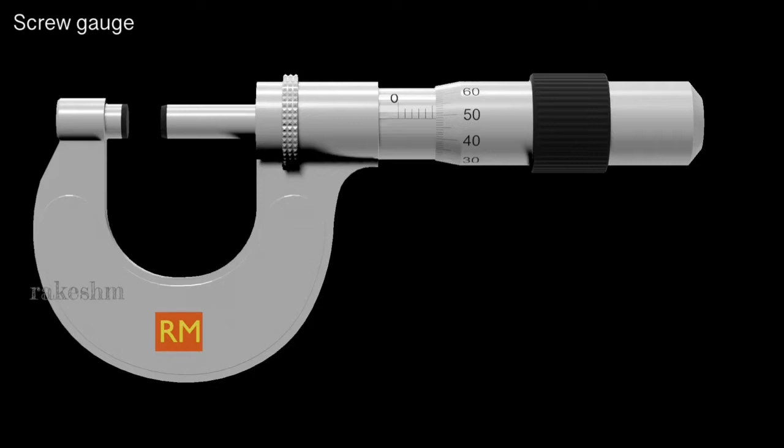Today, let us study about screw gauge. It is an instrument used to measure lengths up to an accuracy of 0.01 millimeter. If you recall, we had discussed the least count of a meter scale was 1 millimeter, or it could measure accurately up to 1 millimeter. The least count of vernier calipers was 0.1 millimeter, and now we are going to study screw gauge, and its least count is 0.01 millimeter.

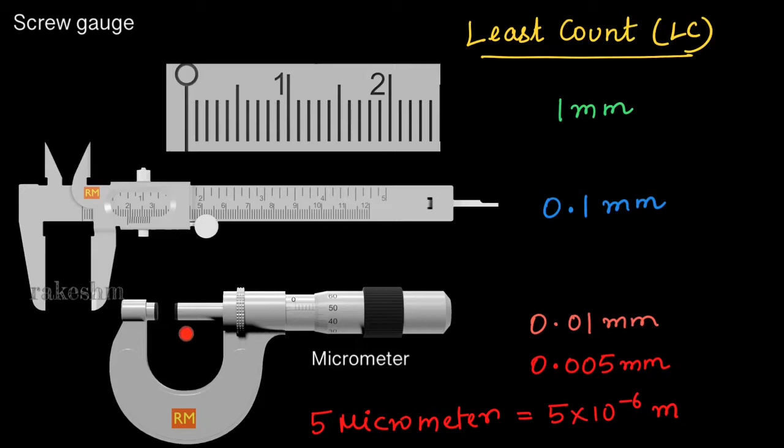There are screw gauges which can measure lengths up to 0.005 millimeter also. This 0.005 millimeter is nothing but 5 into 10 power minus 6 meter, which is also 5 micrometer. Now, as the screw gauge can measure lengths up to the order of micrometers, it is also called as micrometer screw gauge or micrometer also.

One more important point to remember is that the least count of an instrument is also the maximum possible error. So if this vernier caliper can measure lengths accurately up to 0.1 millimeter, below this length it cannot measure accurately. So we say the maximum possible error of this vernier caliper is 0.1 millimeter. The maximum possible error this meter scale can have is 1 millimeter. The maximum possible error of a micrometer screw gauge is 0.01 millimeter.

So if you are getting the reading of this vernier caliper as 2.3 millimeter, then the error in the reading will be 0.1 millimeter. So just remember this, this will be important while solving questions.

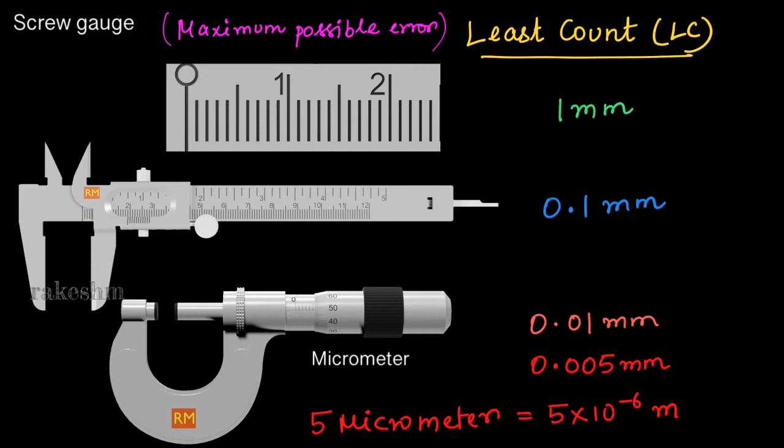Now let us understand the different parts of a screw gauge. The part that you see here is called the linear scale. This scale is fixed. This part that you see here is called the circular scale. This circular scale can be rotated about the linear scale. The part here is called the screw, and it can move forward or backward based on the rotation of this circular scale. I will discuss with you how this screw moves forward and backward when the circular scale is rotated. The part that you see here is called the stud.

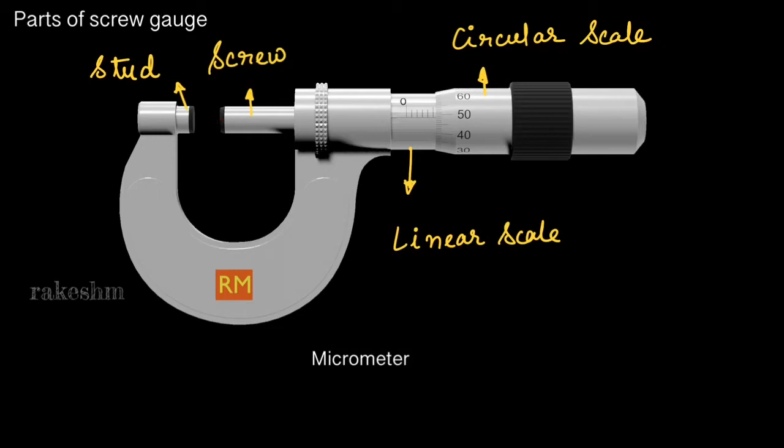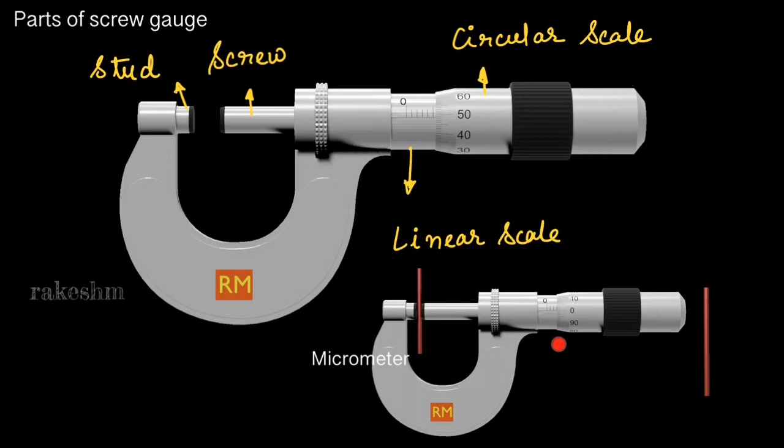When the end of the screw touches the stud, we say that the reading of the screw gauge is 0. The screw gauge is used to measure the diameter of wires. It is also used to measure the thickness of metal sheets. For example, we have a copper wire here, and we want to measure the diameter of this copper wire. So what we do is we place the copper wire like this in between the stud and the screw and take the measurement of the diameter of the copper wire from here.

Now, let us discuss the principle of working of a screw gauge. We have a screw here, and these you see are the threads of the screw. The separation between any two threads is called pitch. Remember this term. When the screw makes one rotation, it moves forward or backward by a distance of one pitch, which is the separation between these threads.

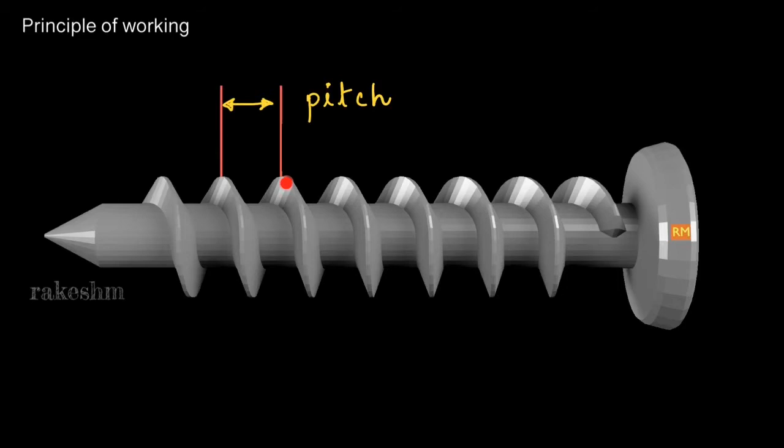So the direction in which the screw moves can be determined by the right hand screw rule. If you curl your fingers in the direction of rotation of the screw, then the thumb will point in the direction of motion of the screw. Let me play the schematic now, and one more thing I want you all to notice is, when this screw makes one complete rotation, it moves forward or backward by the distance equal to the length of this pitch.

So you can see here the fingers are curling in the direction of rotation of the screw, and the screw is moving forward. In one rotation it has moved by one pitch length.

In this case, we will rotate the screw clockwise and let us see in which direction the screw moves. You can also use your right hand and curl your fingers in the direction of rotation of the screw, and the thumb will point in the direction of motion of the screw. Let us have a look at this.

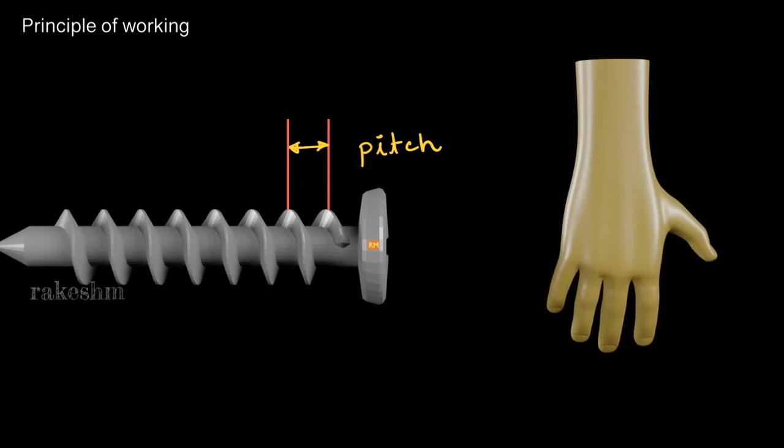So you can see here the fingers are curling in the direction of rotation of the screw, and the thumb points in the direction of motion of the screw. Meanwhile, during one rotation, the screw has moved by a distance which is equal to the pitch length of the screw.

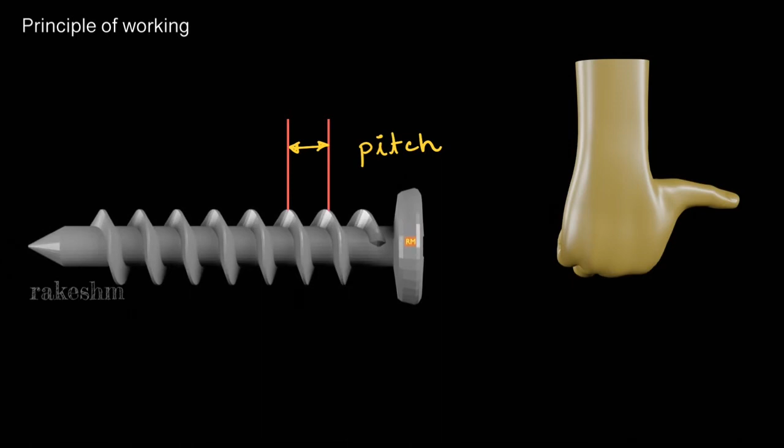So here you can see how the screw gauge works. As I showed you in the screw, when this circular scale is rotated clockwise or anti-clockwise, depending on the sense of rotation, the screw here moves forward or backward. Let us have a look at the schematic.

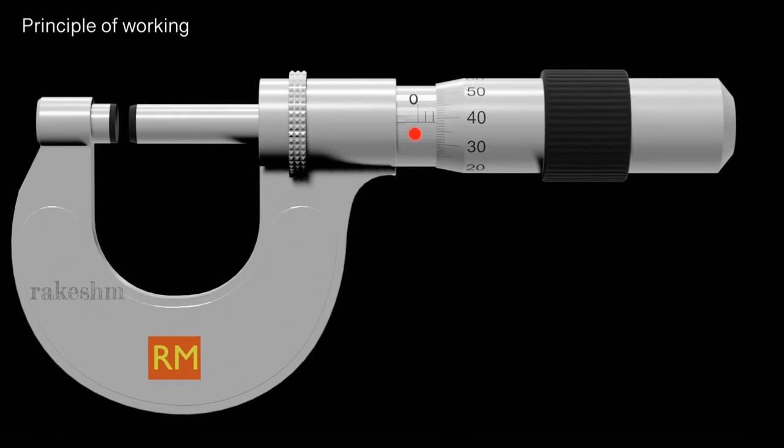Observe here, when this circular scale is rotating in this direction, the screw here is moving forward. And if you want to measure the dimension of any object, you place the object here and take the reading from here.

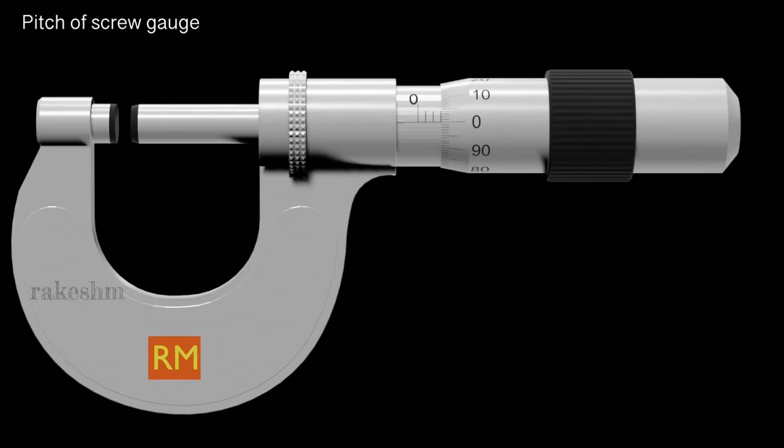Next, let us learn about the pitch of screw gauge. I will just magnify this part and show you and help you understand what is pitch. Pitch is the length moved by the circular scale when it completes one full rotation.

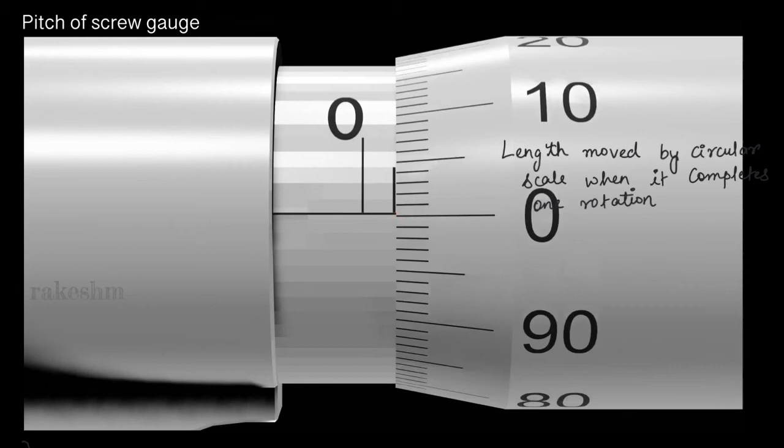Let us have a look here. When the circular scale completes one rotation, how much does it move? So when it is rotating, you see it is moving this side, and it has completed one full rotation and the zero has come back. It has moved by this length here. So this length here is called the pitch of the screw gauge.

So we can define pitch as length moved by the circular scale divided by the number of rotations of the circular scale. Remember this formula for pitch of a screw gauge.

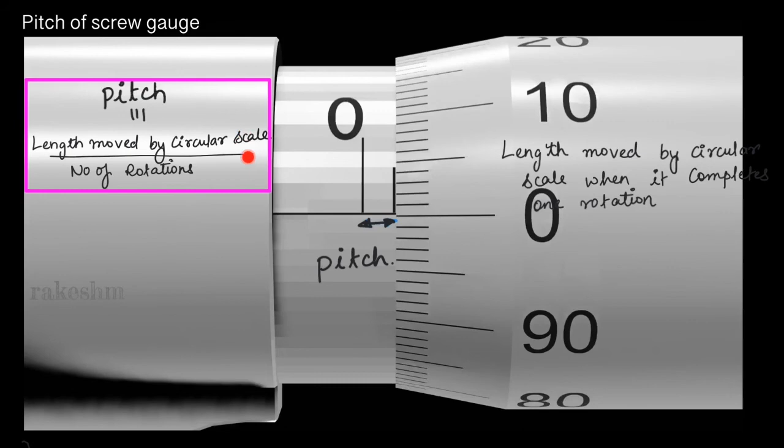The least count of a screw gauge is given as the pitch divided by the number of divisions on a circular scale. Let us now understand this formula. So if 100 divisions correspond to the pitch, then one division will correspond to pitch divided by 100. Let me tell you what it means.

Now the 0 of the circular scale is coinciding with the 0 of the linear scale. So now I have moved the circular scale such that the first division here is corresponding to the linear scale. So if for 100 divisions the circular scale had moved by pitch, then for one division it would have moved by pitch divided by 100, which means the small length that you see here that it has moved is nothing but pitch divided by 100.

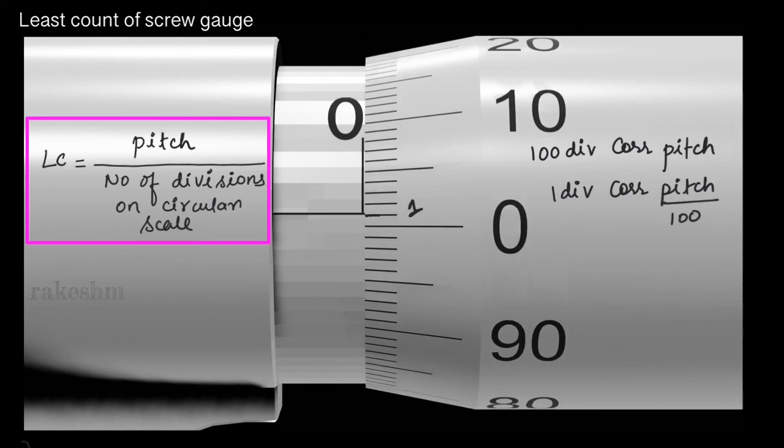So the length which corresponds to the first division coinciding with the linear scale is also called the least count of this screw gauge. Remember this formula for least count of screw gauge.

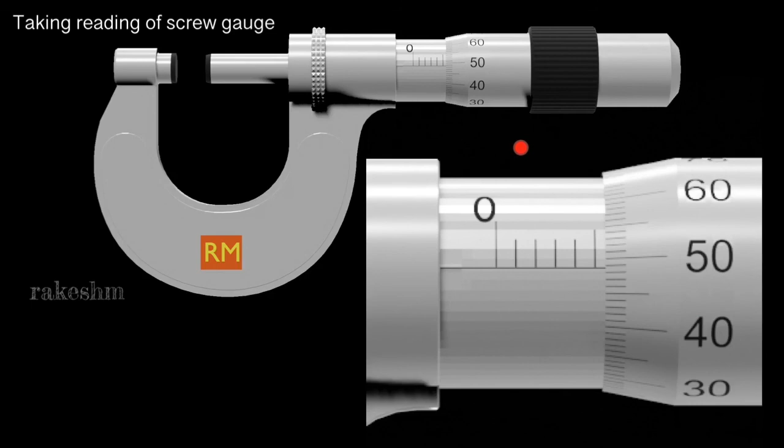Let us now understand how to take the reading of a screw gauge. Let us assume we have placed an object here and the screw gauge is showing the following reading. I have magnified the reading for you here. Let us see how do we take the reading of the screw gauge. So the reading is given by the linear scale reading plus the circular scale reading into the least count.

Here we can see the circular scale is just after 5. So our linear scale reading will be 5 here, or 5 millimeters if we were given the pitch as 1 millimeter. So if this pitch is 1 millimeter, for 5 divisions we have 5 millimeters.

Next, the circular scale reading. We can see the 49th division of the circular scale is in line with the linear scale reading. So the circular scale reading will be 49. I have told you how to calculate the least count of the screw gauge. You can substitute that here. So this is how we get the reading of the screw gauge.